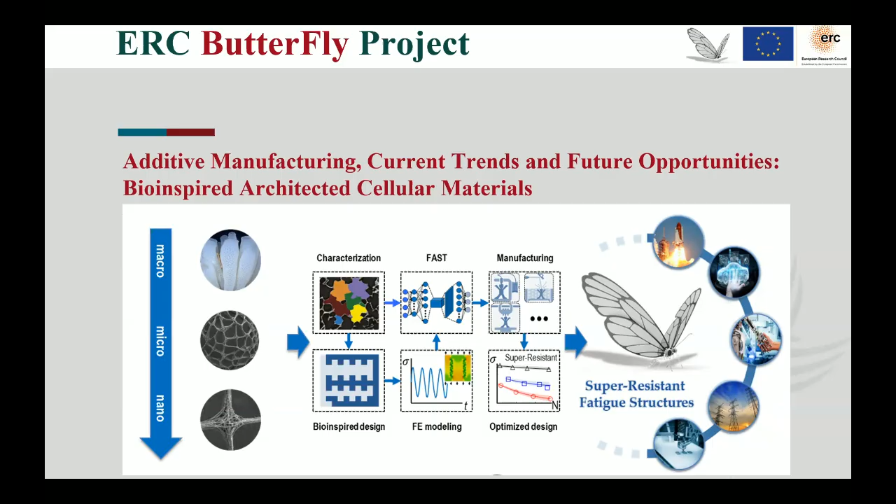The umbrella of the project is Butterfly, which is an ERC financed project, where we have tried to create a super resistant fatigue structure starting from bio-inspired design. This is the aim of the project that I will introduce today.

Dealing with this topic of additive manufacturing as TC15, we have organized a conference that will be held in Vicenza, in Italy, in February 2026, and we will be happy to host all of you there for discussing topics related to additive manufacturing, in particular the structural integrity of additive manufacturing, which is the aim of TC15.

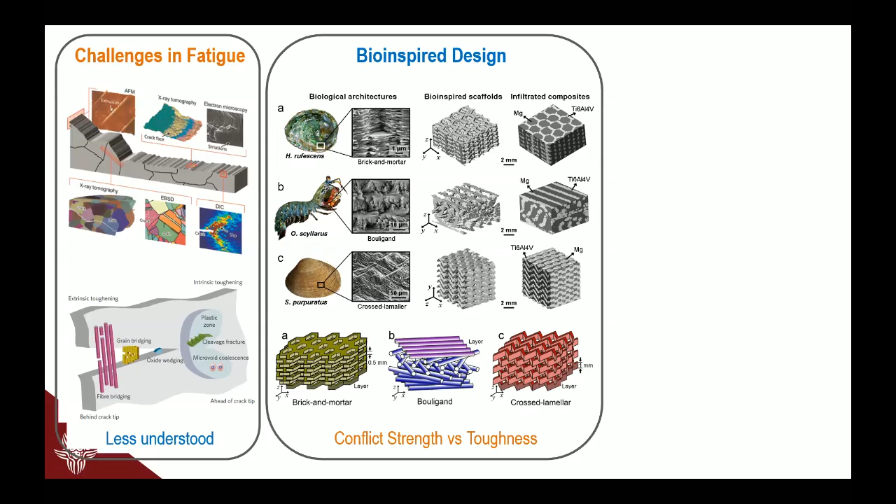It is quite evident that dealing with bio-inspired design, it is possible to solve the issue between strength and toughness. This work with Robert Ritchie has shown that there is the possibility to control crack growth and crack propagation in complex structures, by controlling the geometry of the structure and the relative density of the specimens.

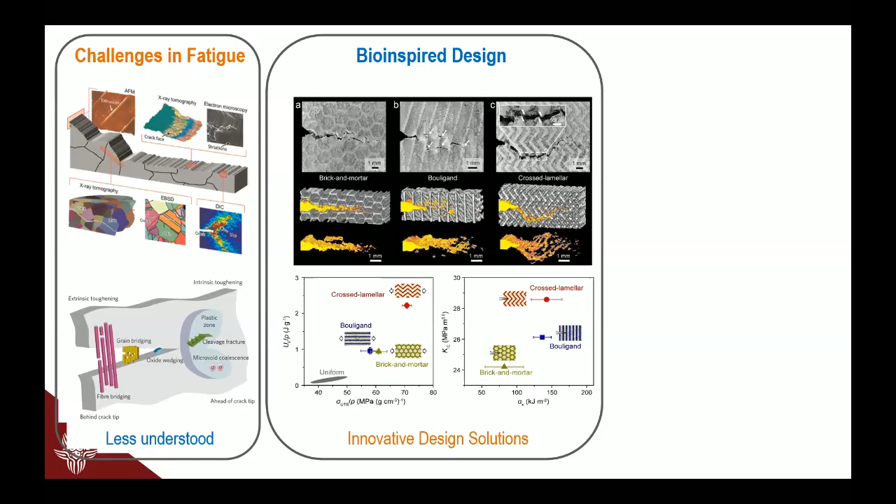So we can create, with bio-inspired design, materials that solve the conflict between strength and toughness, which are usually conflicting properties. We can create innovative solutions that provide a very strong improvement in the mechanical properties of materials, and actually completely change the paradigm in the Ashby diagram, creating new materials and new design spaces.

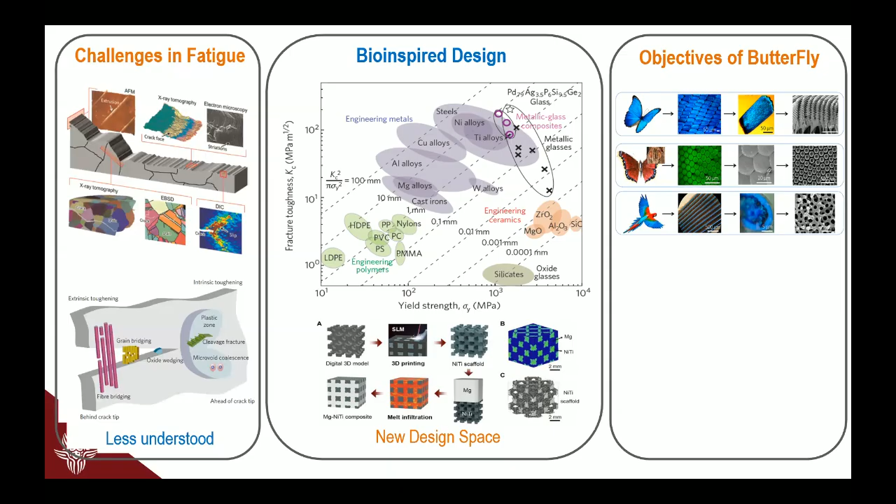The aim of this study that I will present today is to solve the same paradox dealing with fatigue loading, and open almost a new research field, which is bio-inspired fatigue design, a topic that was really not touched much by our community, despite a few researchers having worked on it. Nature is able to produce complex structures that automatically survive cyclic loading.

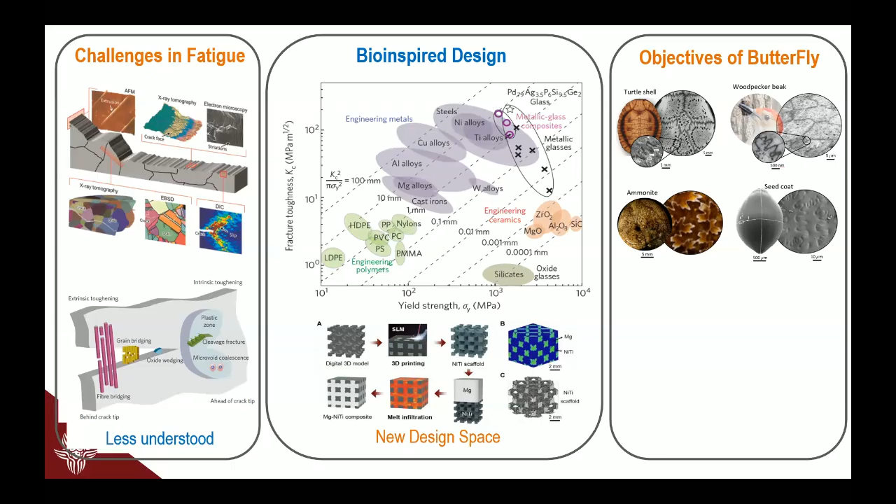I want to mention that there are specific interlocked structures created to increase the contact surface at the interface, improving the fatigue strength and fatigue life of components. So the question we asked ourselves in this project was: how can we create a new generation of super resistant structures with bio-inspired design?

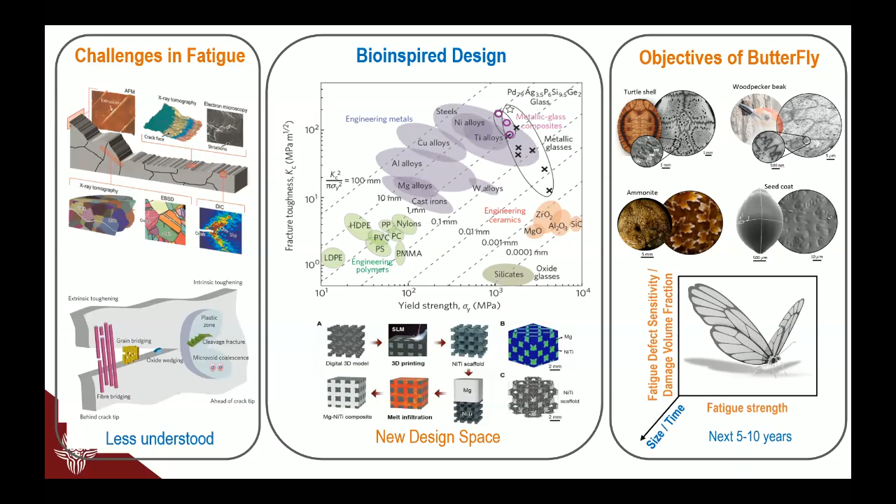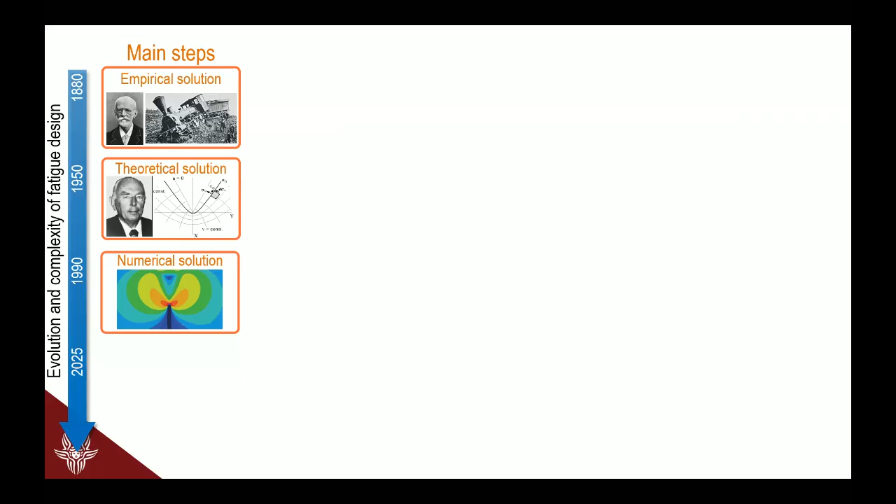The aim and the name of this project is Butterfly. We have also obtained some preliminary results, and what's important to mention is that dealing with fatigue loading, we started from empirical solutions, then went through theoretical proposals and solutions, and now we have the advantage of numerical solutions.

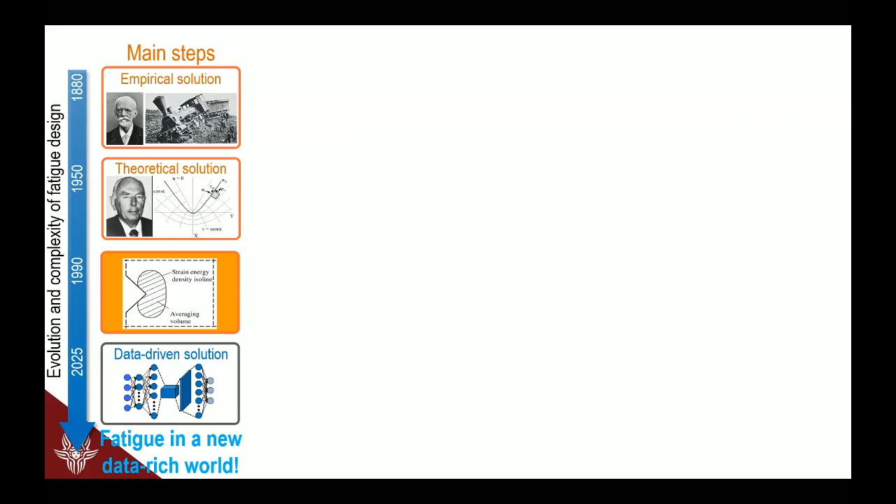But what we really have now is that we can see fatigue in a new, data-rich world with data-driven methods. Another important point is that when considering fatigue issues, and bio-inspired design in particular, there are three ingredients that you always have to consider to make a proper design.

The first point is to consider the metastructures or geometries of your components, which can be very complex. If you look at natural structures, they are able to tune the structure and compose the material in a way to increase and improve the property where necessary, guaranteeing the best resistance for the material.

After that, it is important to consider the constitutive laws, because especially for natural and bio-inspired design, this is a fundamental point. We are not only working with linear elastic materials, but sometimes, for improving the properties, nature is able to provide very complex constitutive laws.

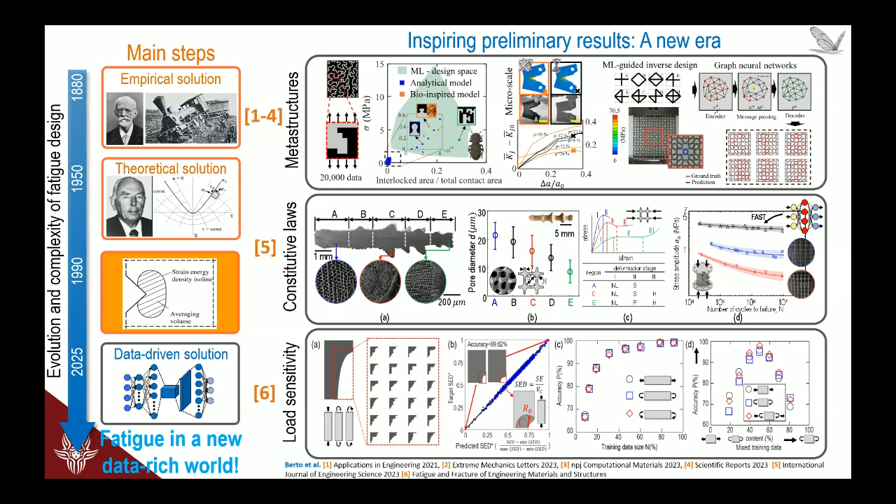After that, the third important point is load sensitivity, the capacity to undergo different complex loading, especially multi-axial loading, which is typical in real structures. We have also published some preliminary results dealing with these topics.

Dealing with this bio-inspired design, one of the best possibilities we have is to consider cellular materials, which are really bio-inspired complex structures. In these slides, we see some examples.

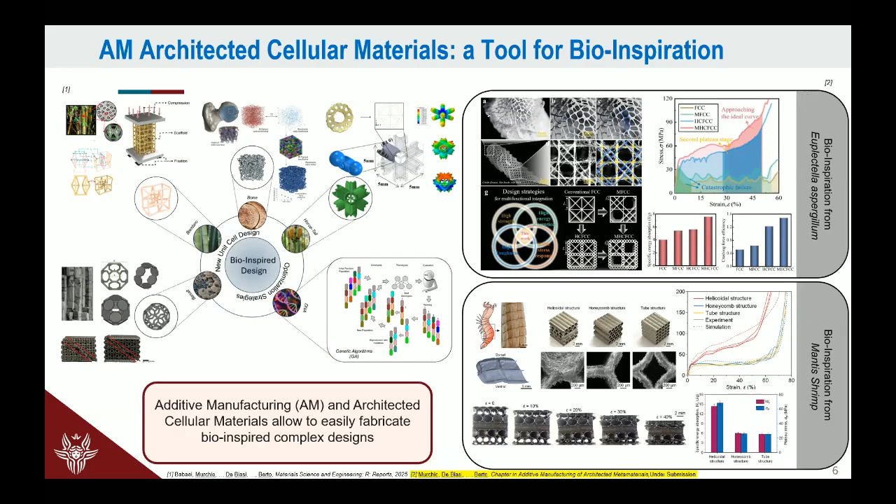What is also really important is that we can not only tune the geometry of the specimens or our components, but we can also tune or control the structure of the material itself.

This is a very good example of what I mean when we consider hierarchical structure, which up to now has been used only for solving the paradox between strength and ductility.

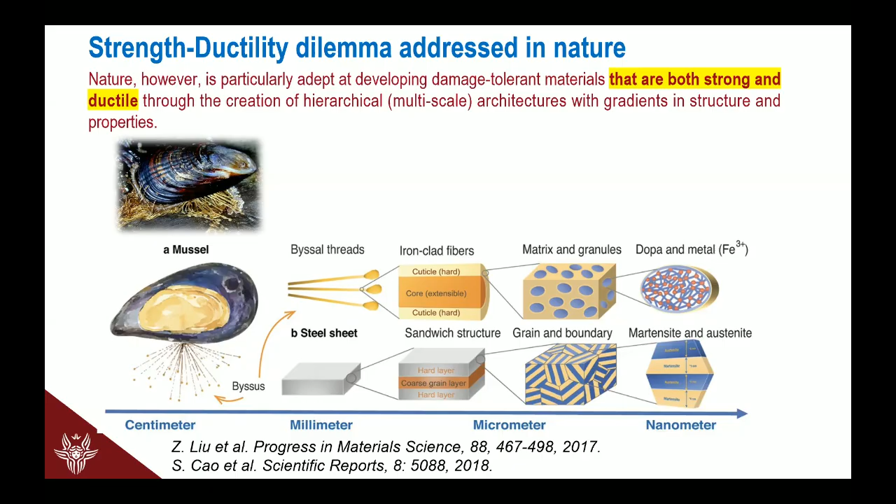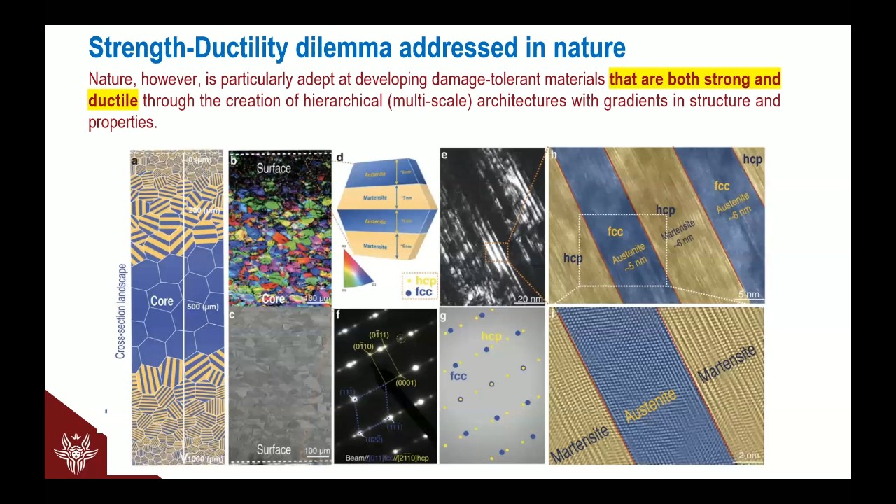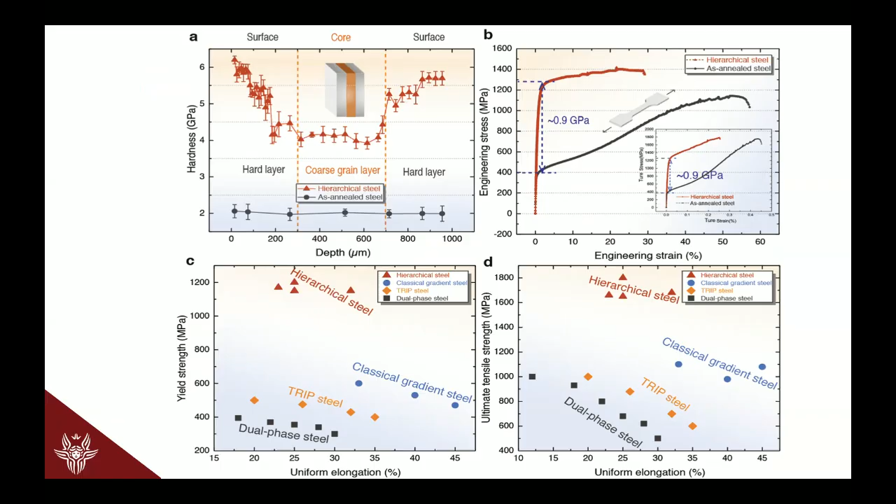You can obtain materials with a hardness that changes, with gradients in the structure, and that can substantially improve all the properties compared with classical steels, increasing substantially the strength, the yield strength, and also the toughness in parallel, which is quite difficult for standard components and materials.

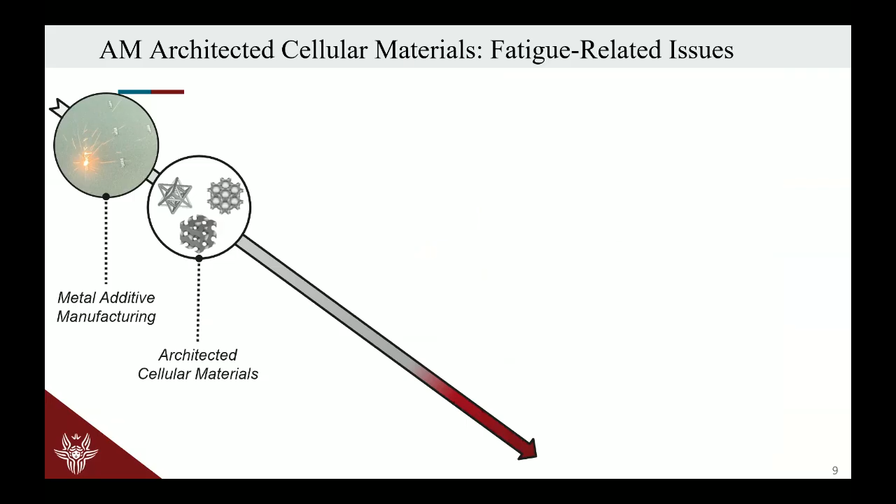Dealing with cellular materials, we have metal additive manufacturing, architected cellular material, which is the topic. Of course, when we have architected cellular materials, we have complex geometries, and the complexity of geometry also induces issues, because we have structural integrity issues, especially related to the fatigue problem.

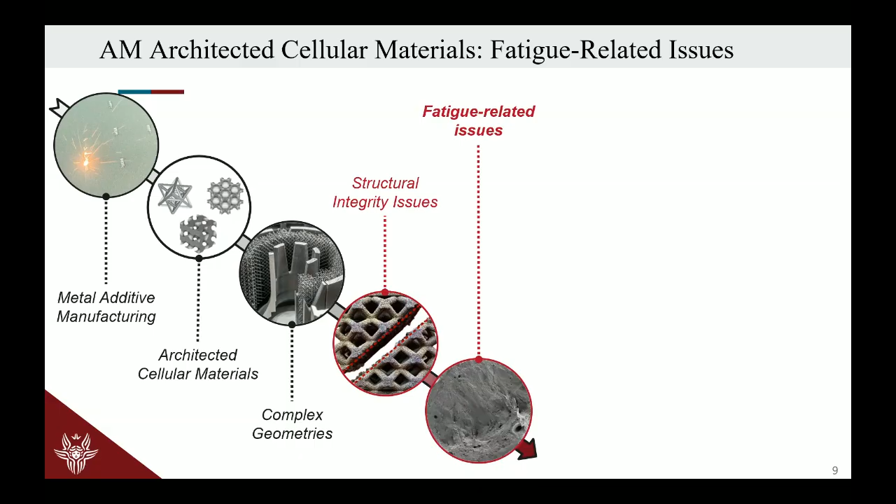So the main point is that we need to be able, if we want to use these structures for real applications, to understand how these structures are sensitive to defects and how they react to the presence of defects.

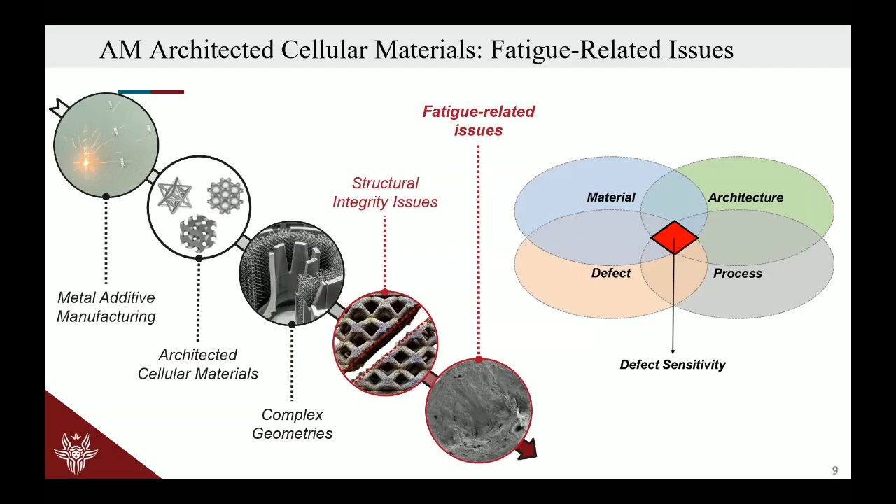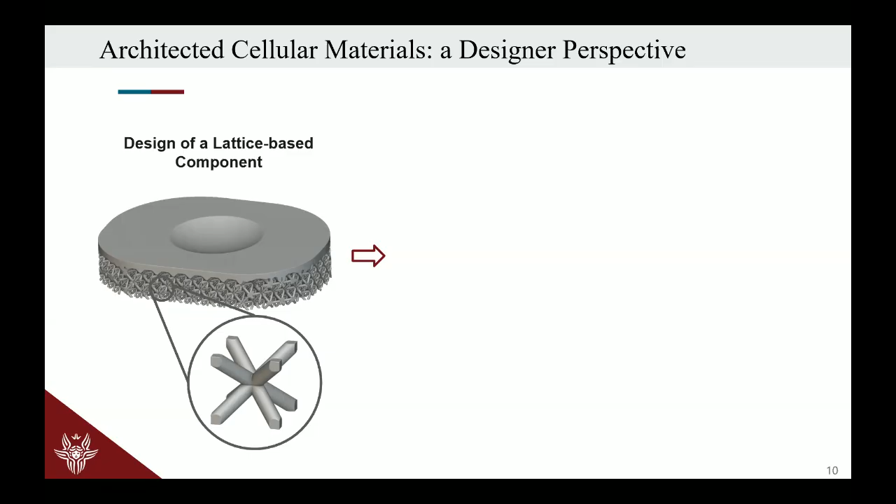So the first thing we did was to design and study very simple geometries for designing lattice-based components. The main aim was to create an as-designed FEM that could provide two requirements, but the more complex the component is, the more intensive the simulation will be. So if we want to study these complex components, we need a very strong computational effort, which is sometimes impossible for real applications.

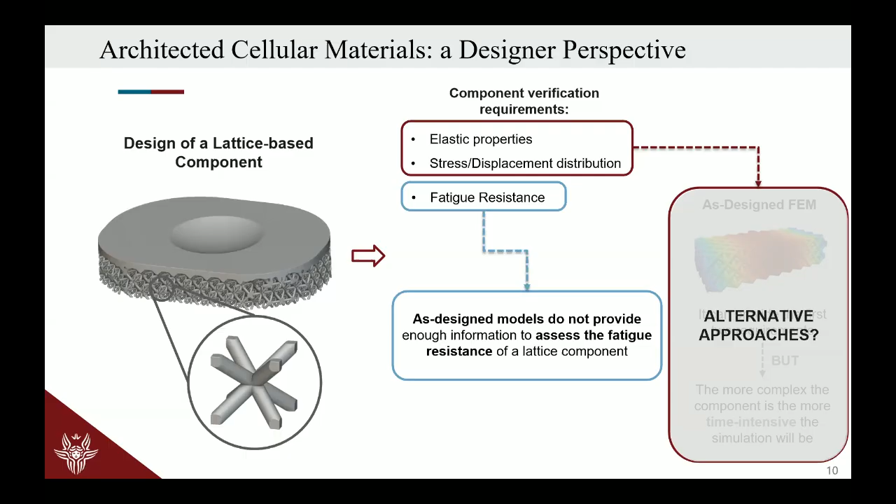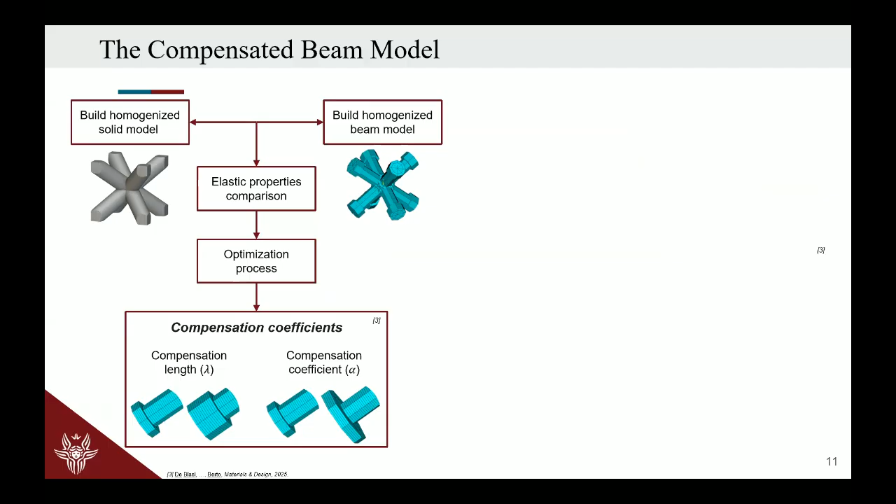So are there any alternative approaches to that? What we tried to do was create a simple model to represent these cellular structures. In particular, we proposed, inside this project, a compensated beam model that was set up and validated to show that it was able to fit the real behavior of the real lattice structure.

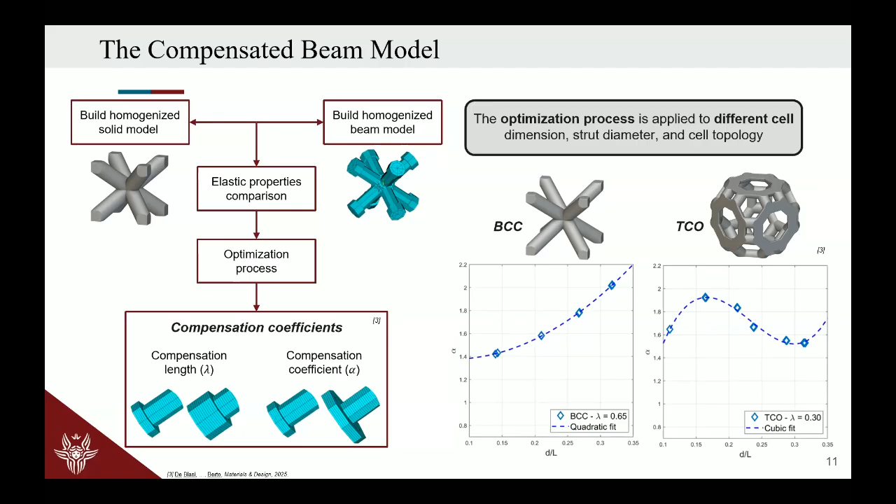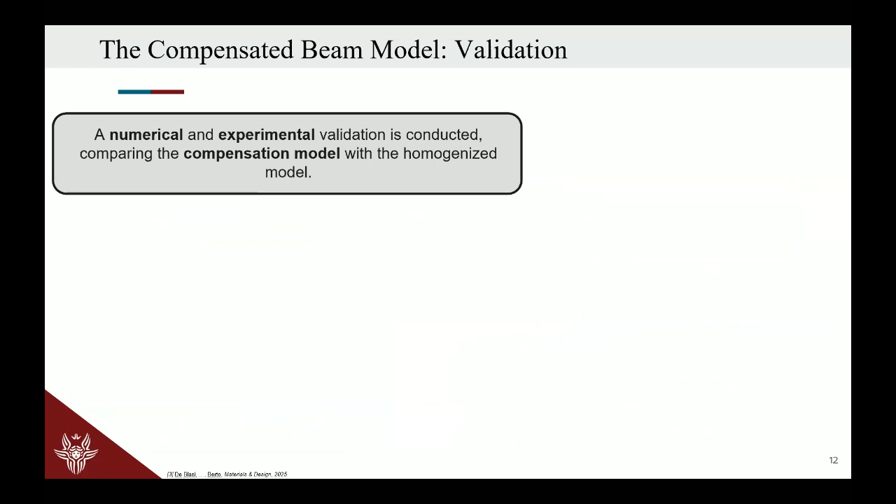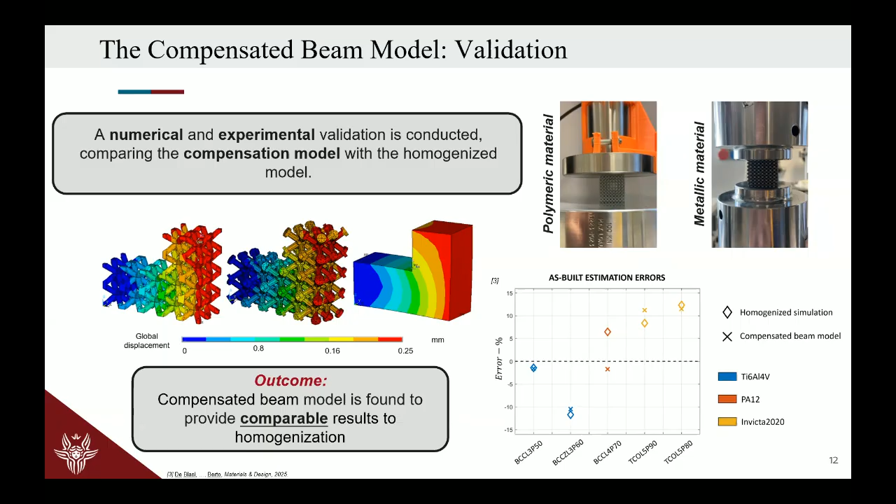A numerical experimental validation was conducted comparing the compensated model with the homogenized model, and what we obtained is that there is very little variation. If you see the graph on the right side of the diagram, there's a very small variation between the homogenized model and the lattice beam compensated model. So the outcome is that the compensated beam model is found to provide comparable results to the homogenization.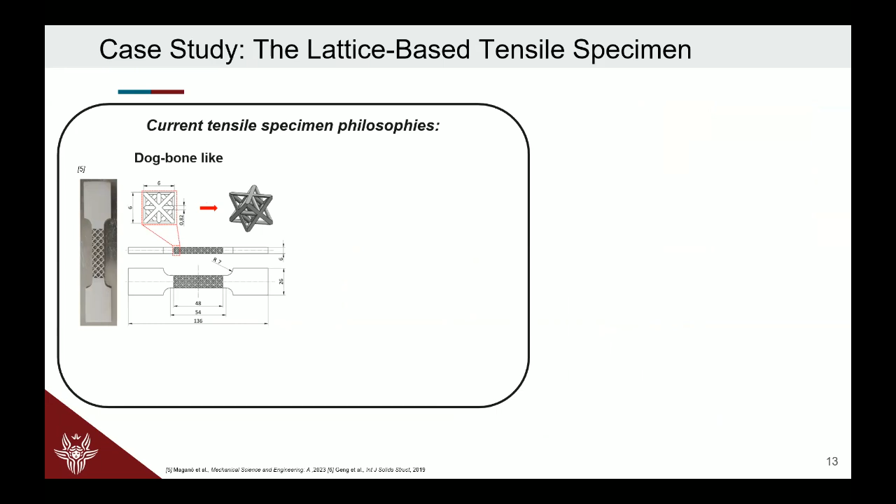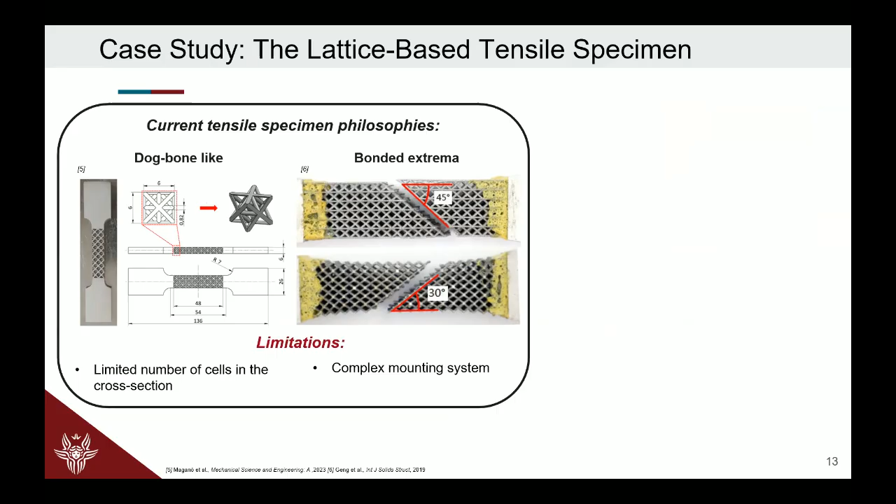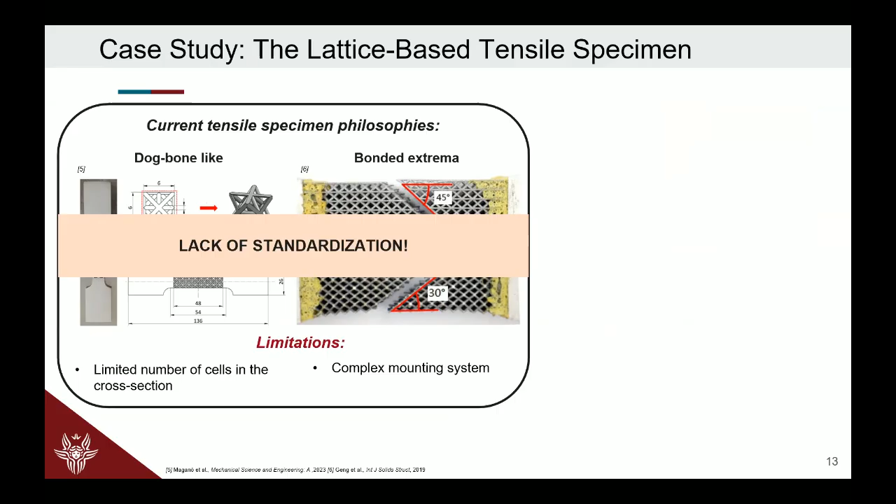Another important point is that dealing with these cellular structures, particularly with fatigue loading but also static loading, what is missing is a kind of standardization for the sample we need to use for the specimen. So as a second step, we tried to create a standardized sample that allowed failures in the middle of the specimen, always repeatable for different geometries of lattice.

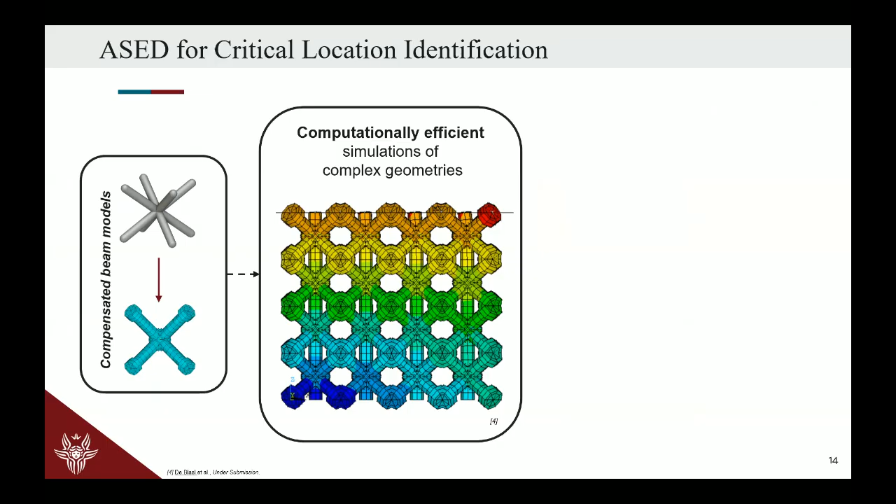So we studied the problem properly, and the idea was to have a computationally efficient simulation for complex structures. We use the strain energy density approach, which is very good for studying the nodes of this structure, which are the critical points, where we can consider a volumetric criterion.

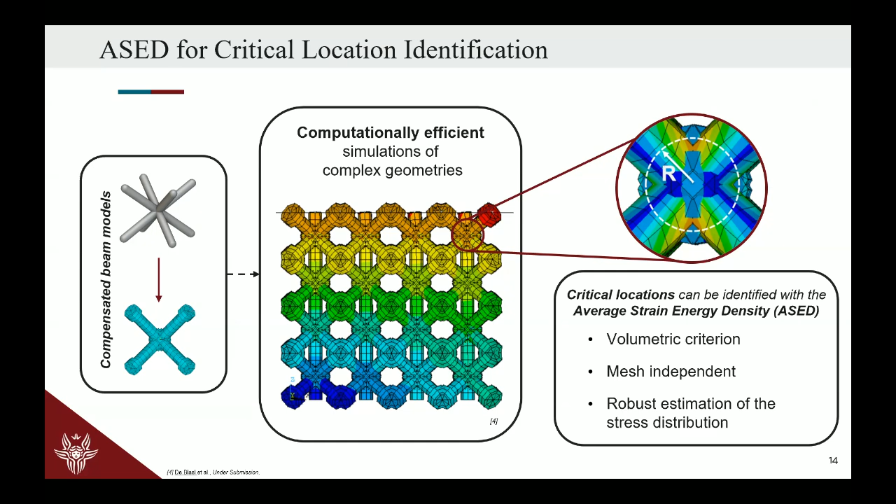We have the advantage that the criterion is mesh independent, so we don't have to take into account mesh refinement. And we have a robust estimation of the stress distribution if we first consider the strain energy density and later the stress.

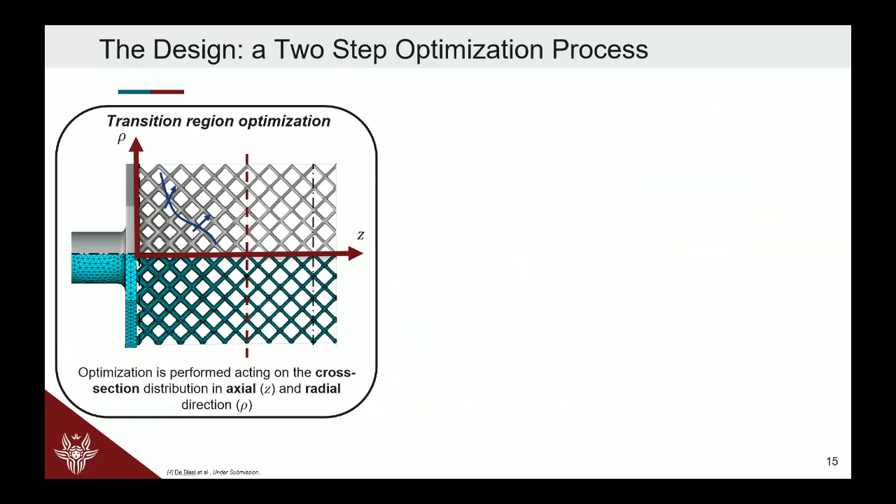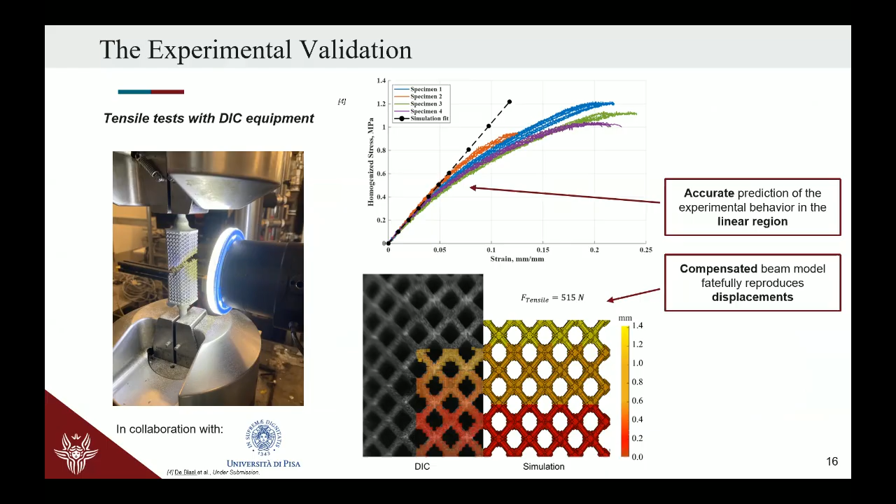So we designed new specimens with a density that was varying along the length of the specimen itself. We studied numerically the problem to optimize this kind of specimen. After that, we went through the experimental setup with the DIC to check if our predictions were correct, if the specimens were failing where we proposed according to the numerical models, comparing numerical with experimental results under static loading and now also under fatigue loading.

So dealing with these fatigue-related issues still remains an open problem, and microstructure and process-induced effects play a fundamental role.

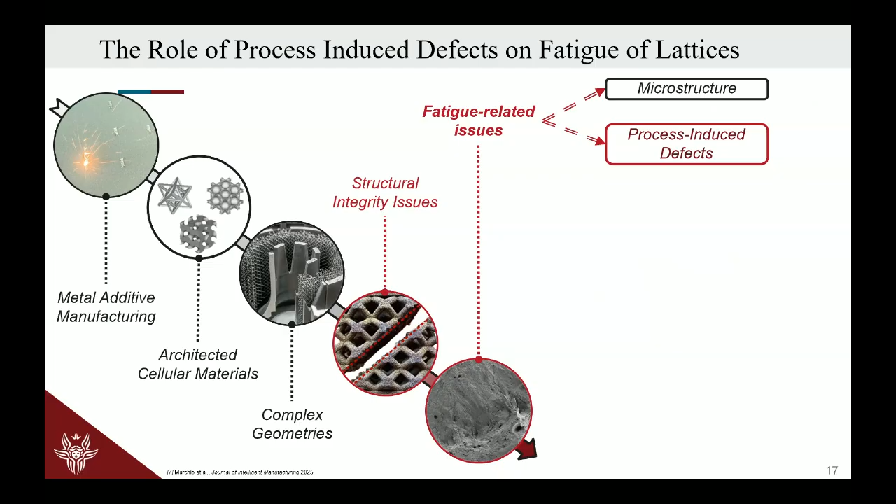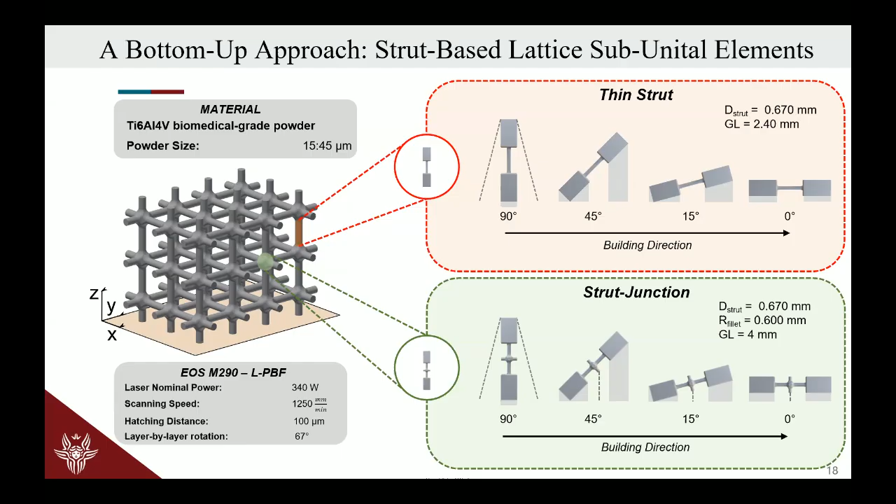So as a third step of this project, what we did was study the behavior of the thin strut of the component, and after that the strut junction of the components, to have a good understanding of the critical parts of the lattice material.

So here it's really a summary of what we did, just an overview. We made tests for fatigue of thin strut specimens, controlling and changing also the mean stress, as was already presented by Simone Murchio in another session on Wednesday.

And we have seen a very strong influence of the mean stress for the thin strut specimen, suggesting this is a very strong and important effect that we have to consider for lattice structures.

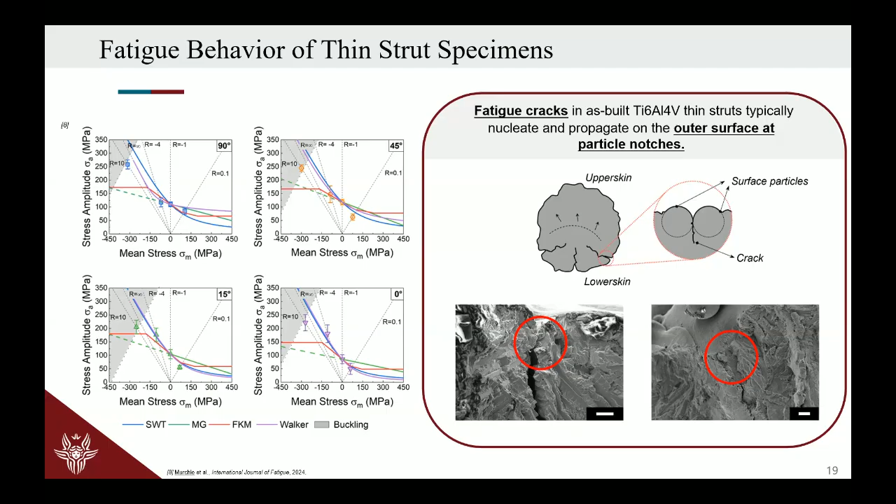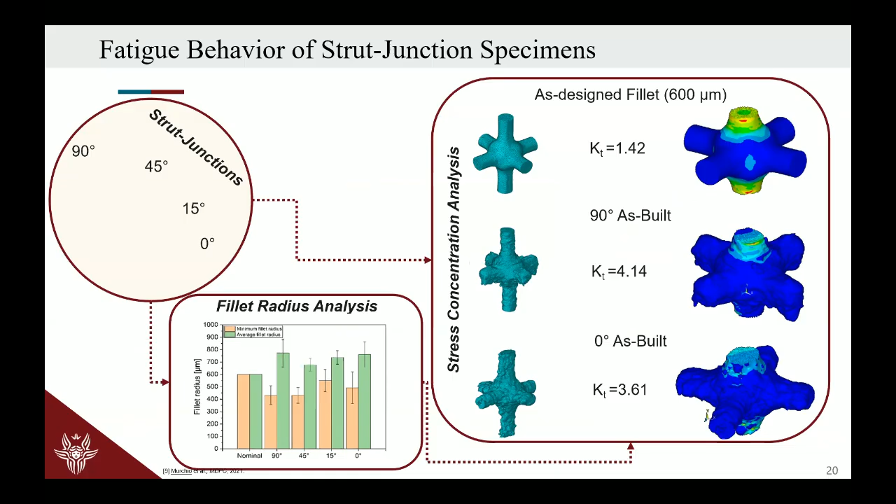After that, we also studied the junction, which is the critical point. The node is always a critical point for fatigue issues because we have variation of the geometrical features, and there you have the maximum stress concentration factor, and there you have the initiation of all the cracks that affect the final failure of the lattice structure.

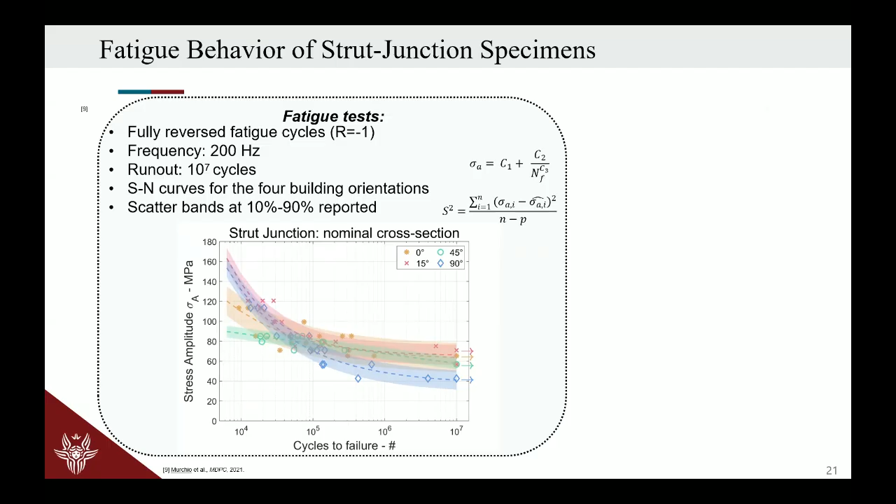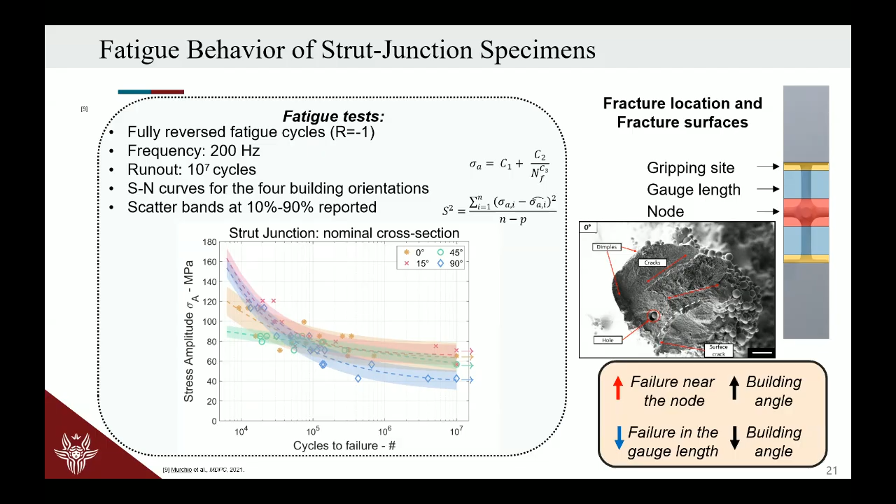Also there, we made a very huge experimental campaign that is only summarized in this slide for lack of time. But the results have shown that failure near the node happens when we increase the building orientation angle, and failure in the gauge length is more statistically probable, happening more frequently when we have a building angle that is decreasing.

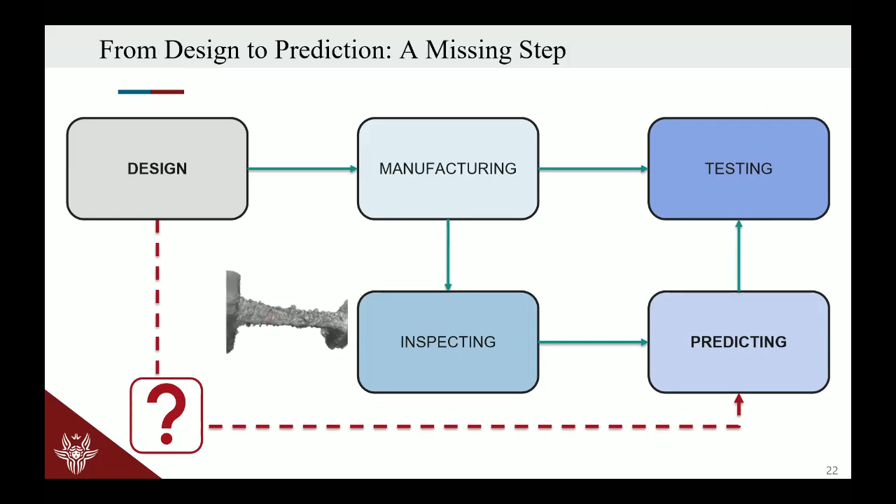Another important point is design, manufacturing, inspecting, and prediction, testing of course, but how we can connect directly design and prediction, because that is the final issue for an engineer, right? So we want to have a design, and a final assessment or prediction of the structure, avoiding useless calculation and useless finite element methods or computational models that are too expensive.

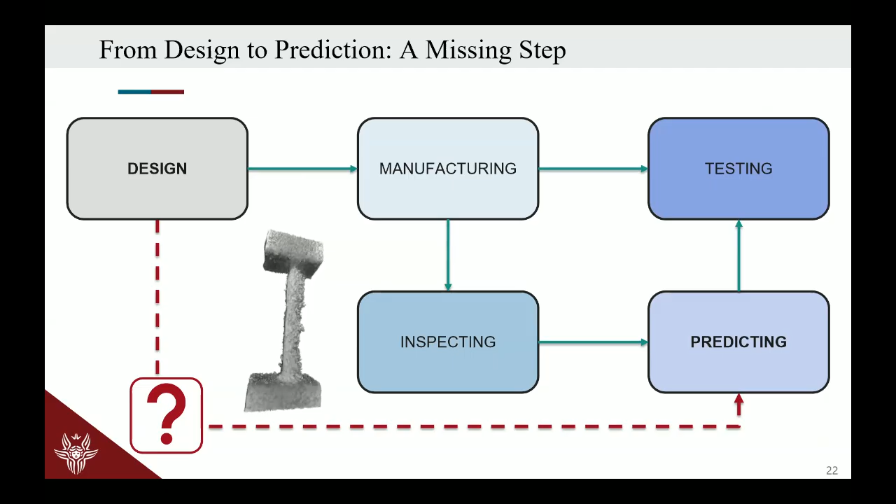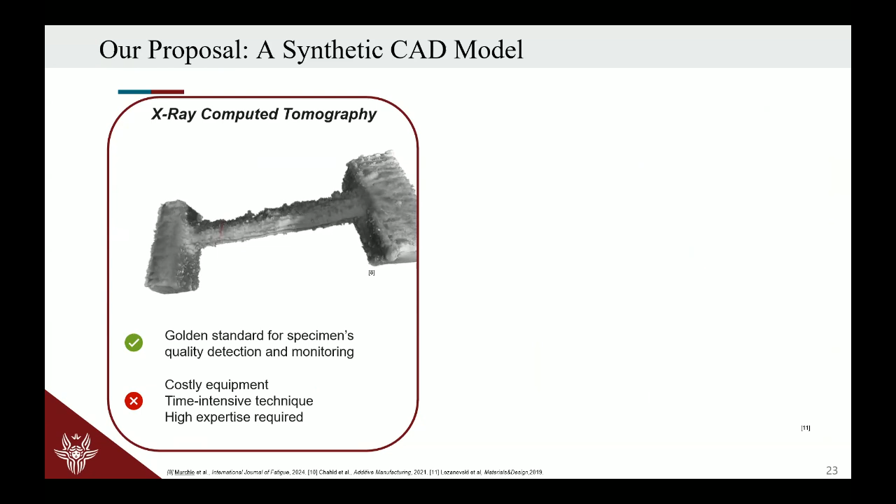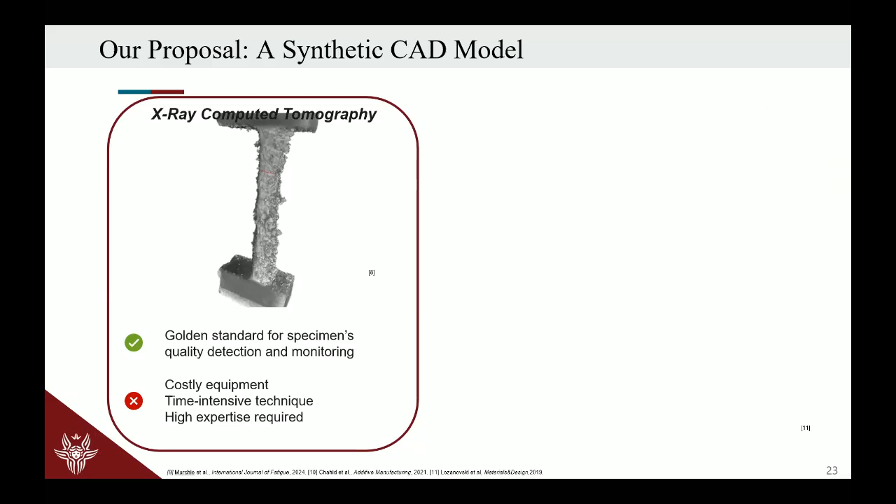So what we did is propose a synthetic CAD model. The idea is that usually when you consider this kind of lattice structure, due to the fact that the surface strongly affects the failure, you need a CAD model that is able to reproduce your structure, the surface roughness, and study that from a very accurate point of view.

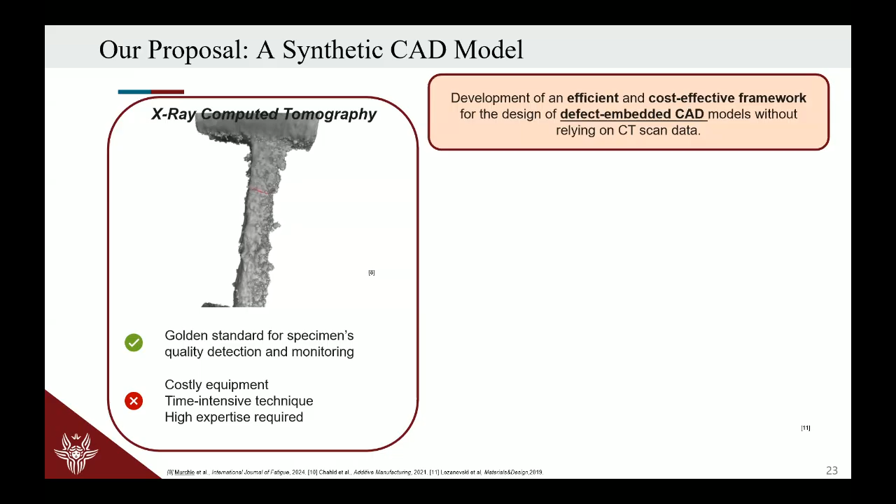But this is very cost expensive, and actually what we want to do is create a simplified model. The simplified model is a kind of synthetic model, substituting completely the CAD strut model. So we want to create an artificial or substituting model that is able to completely replace the necessity of doing a CAD or CT scan analysis of your specimen.

So we propose a CAD strut model framework based on profile extraction, waviness and roughness, and 3D spline generation, that can work without making any CT scan, which is very expensive and very time consuming.

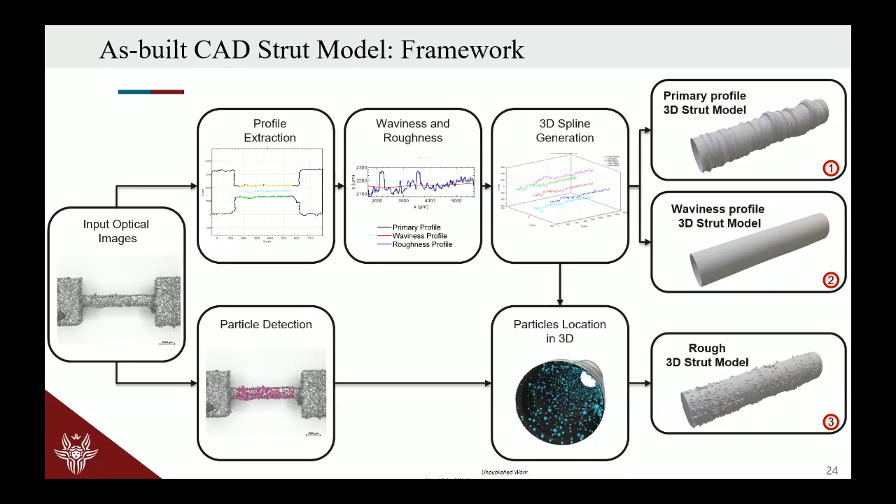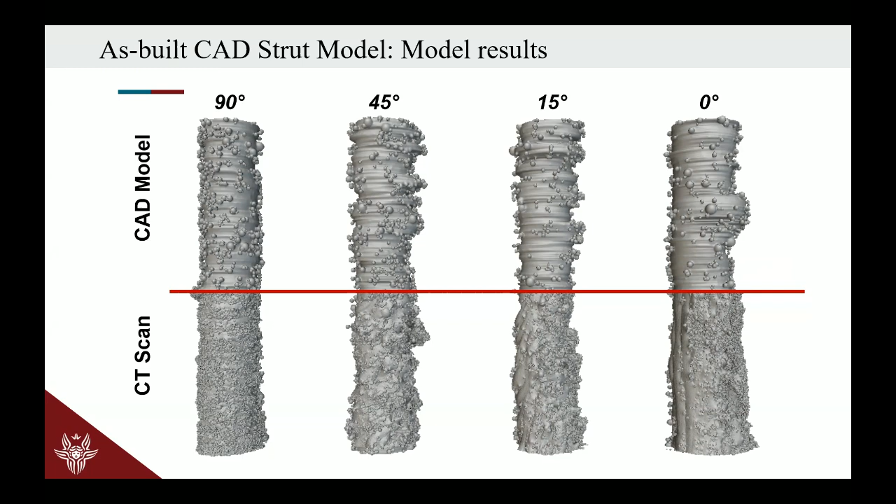After that, we also went to the life prediction or fatigue life prediction of this structure. I will be quite brief, but we proposed the strain energy density approach, which is quite efficient because, as mentioned before, it's not sensitive to mesh refinement, and the results are quite accurate even with coarse meshes.

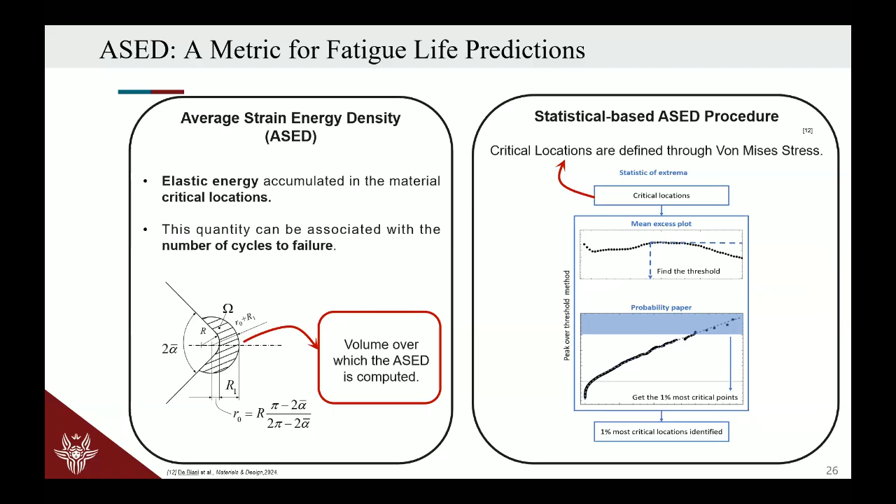So first of all, we evaluated whether with the CT scan model and with the CAD model, we were able to check and find the real initiation point for fatigue failure in this kind of structure, and actually it works.

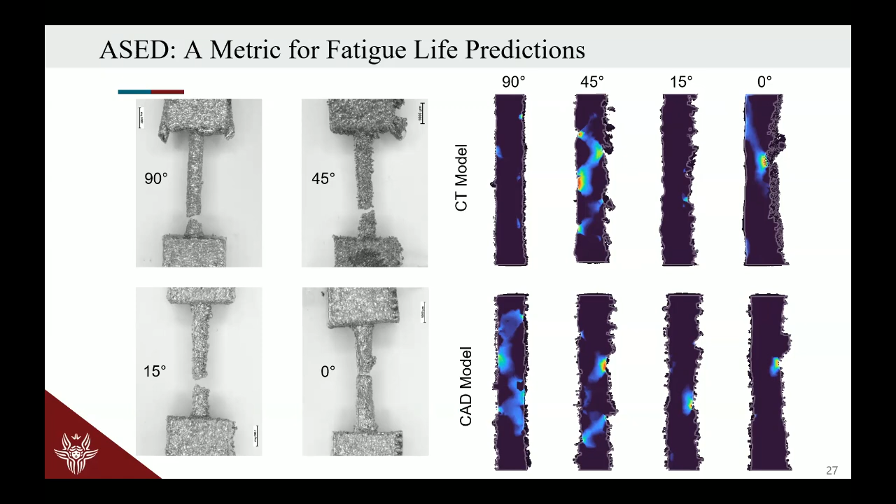It works not very well for the 90-degree sample because the orientation is very extreme, and we are still improving the model. But for the 45, 15 and 0 degree cases, it predicts quite perfectly the initiation point of the crack. Using the strain energy density, we were able to summarize all the data from different orientation angles and geometries inside the same scatter band, providing a kind of master curve for lattice materials.

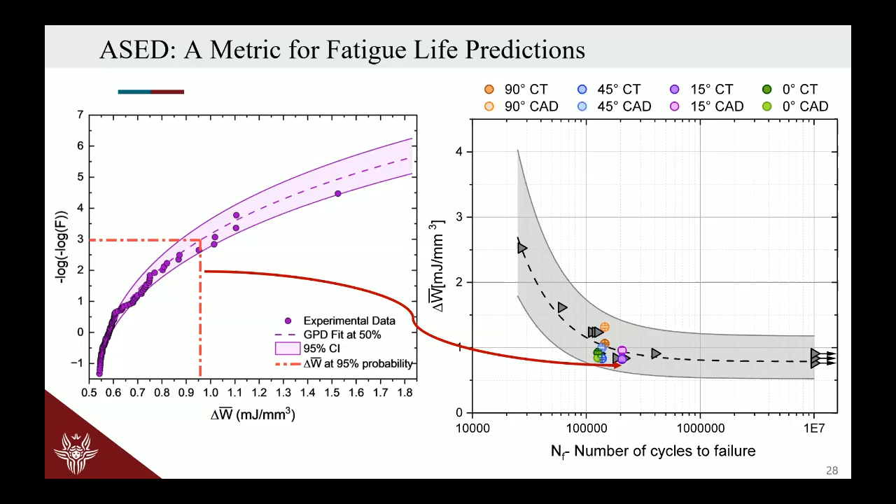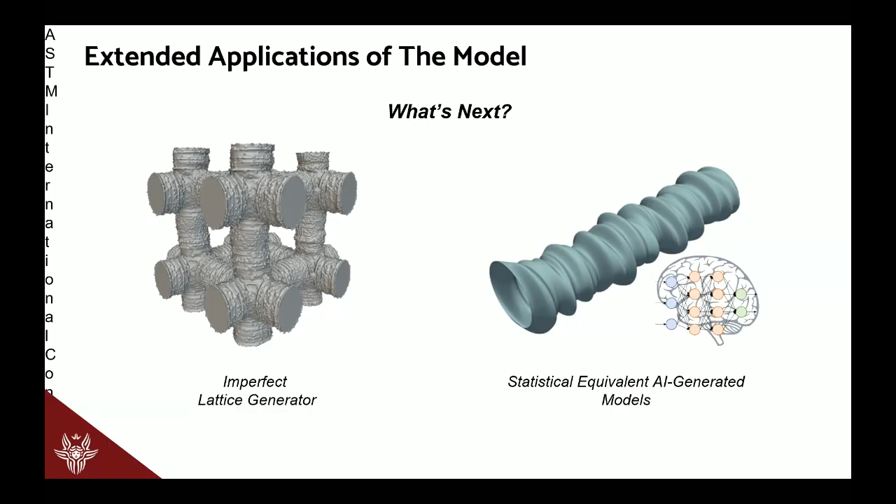So what's next? The next step is to have the help of a kind of statistical equivalent artificial intelligence to generate models that will help us bypass the finite element models, which are computationally expensive, while still providing a good profile and description of our lattice materials. The idea is to create a statistical database: point cloud generation, surface mesh generation, finite element analysis. But this is not sufficient.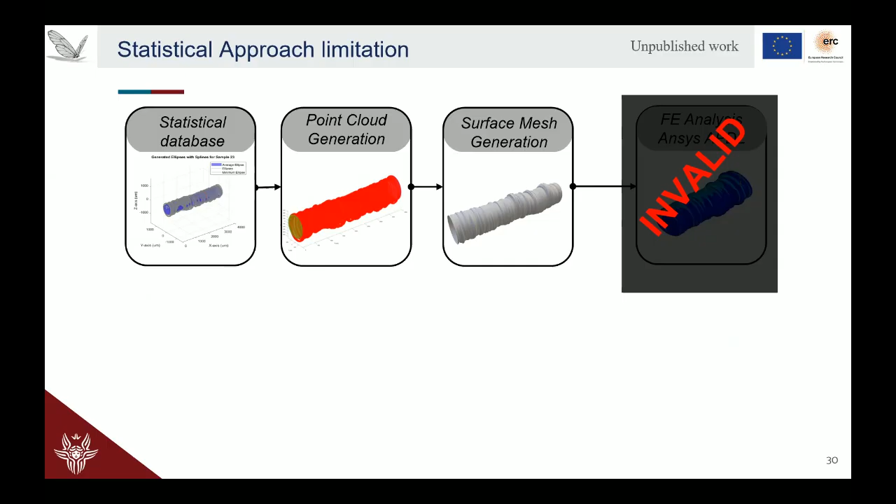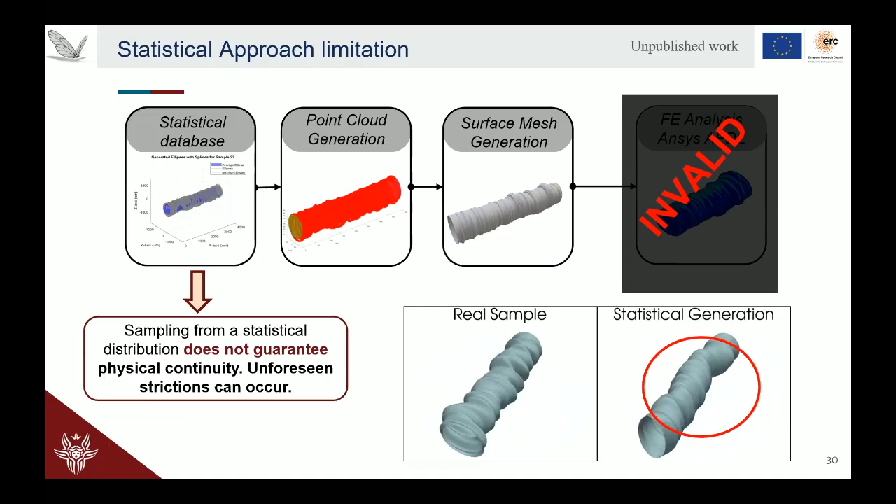Only considering continuity between the parts is not enough, so we use an artificial neural network that can learn the relationship between the generated strut and is able to make a better match with the real surface and the real roughness of the real structure.

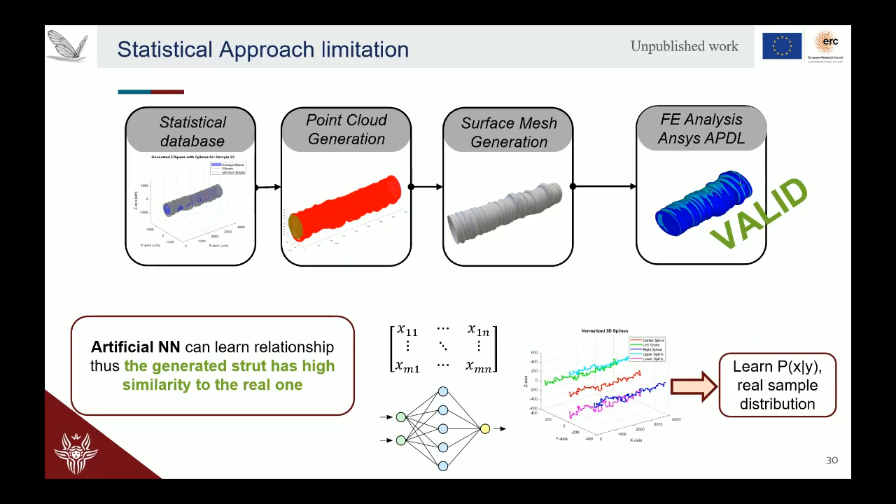So, the pipeline of the artificial intelligence model we selected is this one. We have selected a non-adversarial network plus a genetic algorithm. I will not go into the details here, but the papers will be available soon, so you will have all the material ready.

What is quite interesting is that with this artificial intelligence generated profile, we were able to obtain fantastic results that match the CT scan results almost perfectly.

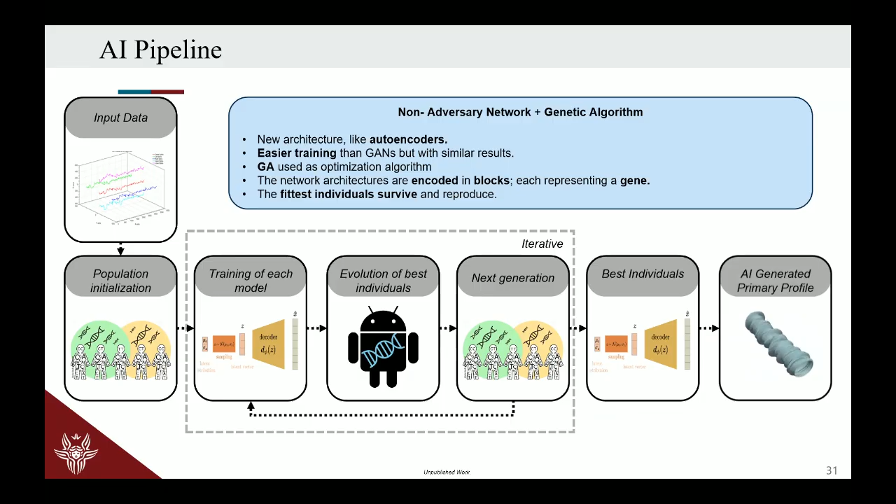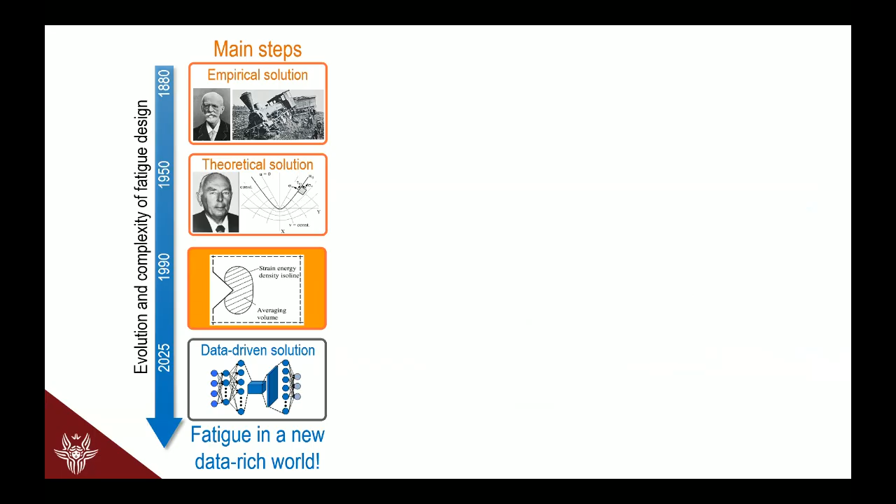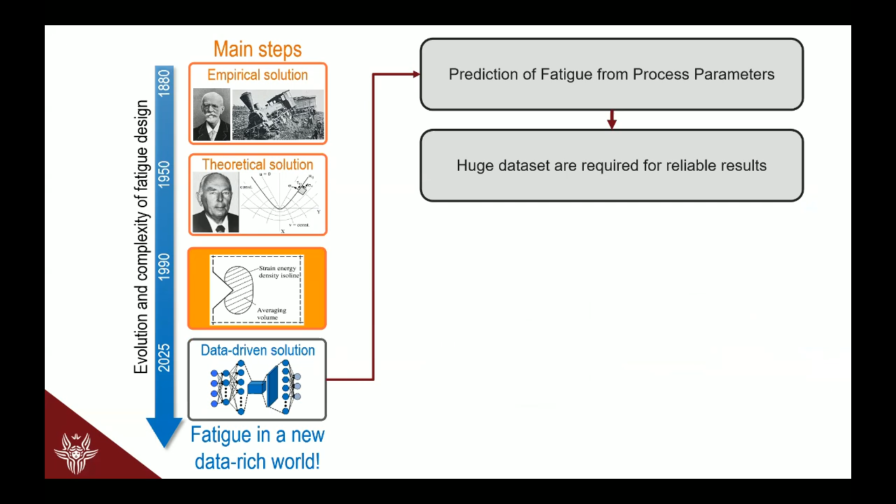After that, the main step I mentioned before is that we have placed fatigue in a new data-rich world, which was one of the aims of this project: prediction of fatigue from process parameters. Huge data sets are required for reliable results, but there is a lack of well-structured data sets from literature on AM fatigue.

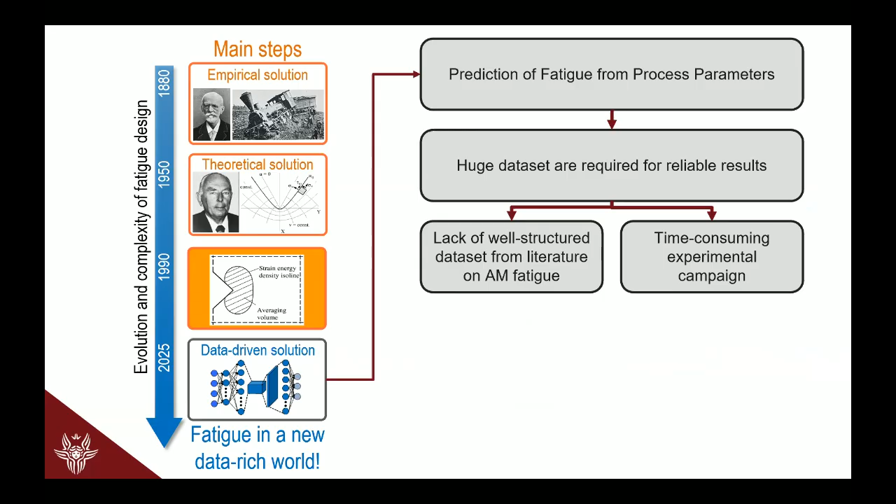It is quite time-consuming experimentally, but we want to build and validate this neural network architecture starting from FDM prototypes, which are not very expensive and easy to print, where we can study the geometrical features of these lattice materials. After that, we retrain what we obtain in terms of artificial intelligence network for the geometry, also applying it to metallic materials with a smaller data set.

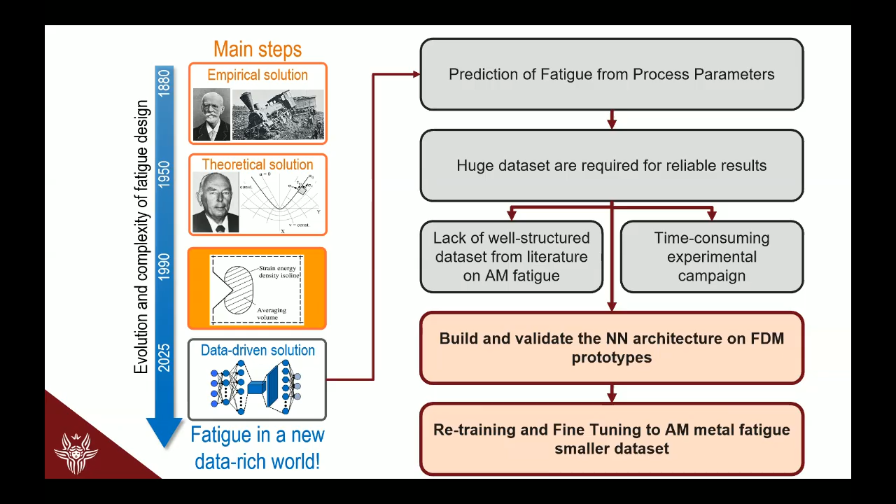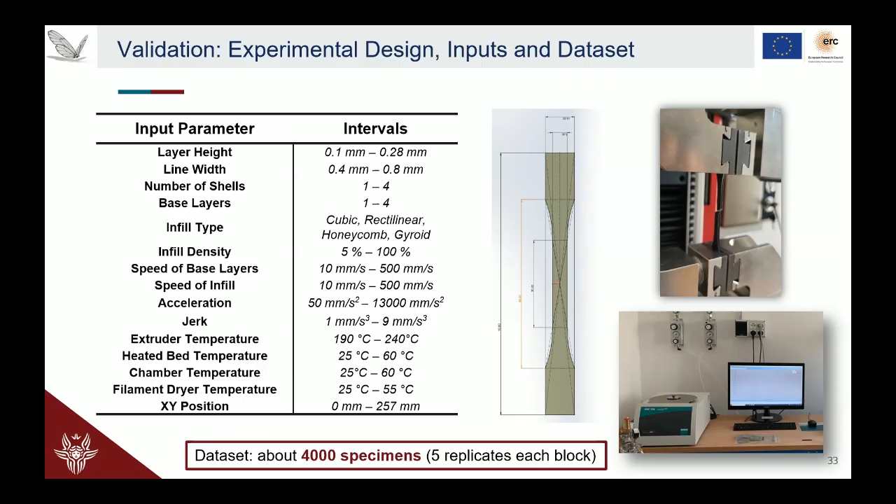So we started a very huge experimental campaign with more than 4,000 specimens, studying different kinds of materials, polymeric materials in particular, and we applied the algorithm reported here, an NSGA3 genetic algorithm, for the final static and fatigue prediction of this lattice material.

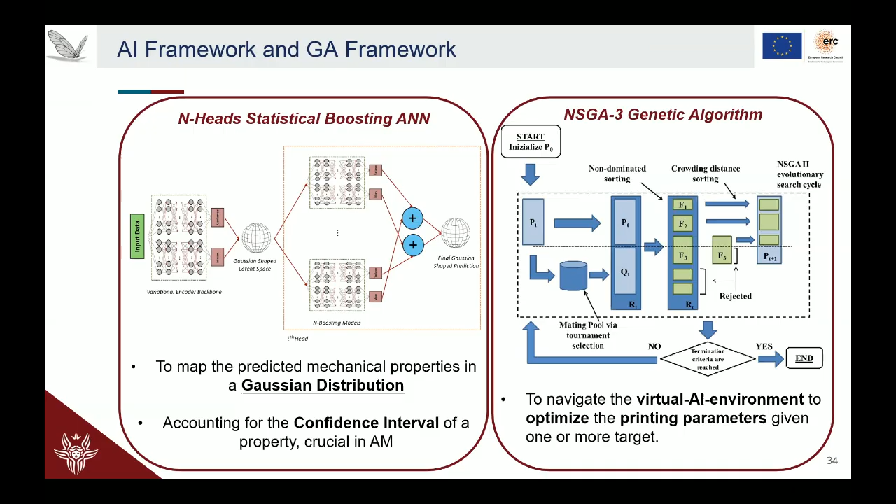We start from a very simple specimen, and after that increase the geometrical complexity to the lattice structures, studying what is happening geometrically and studying the macro and micro defects happening inside our structures.

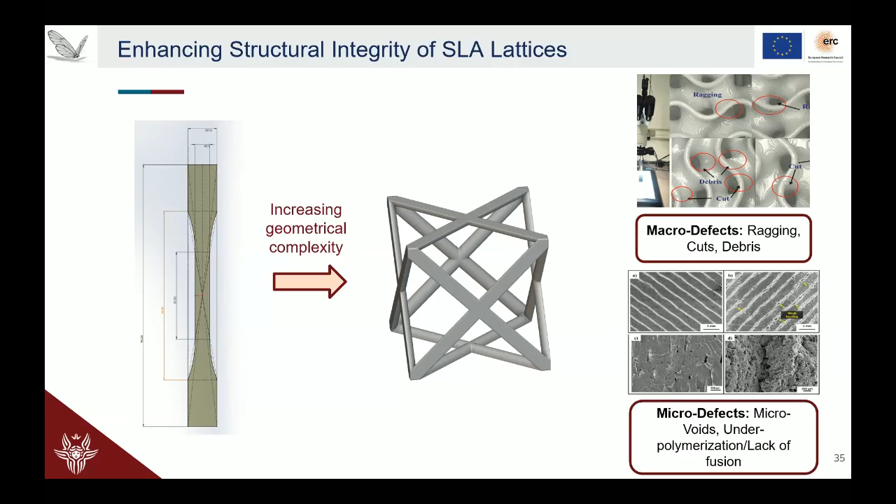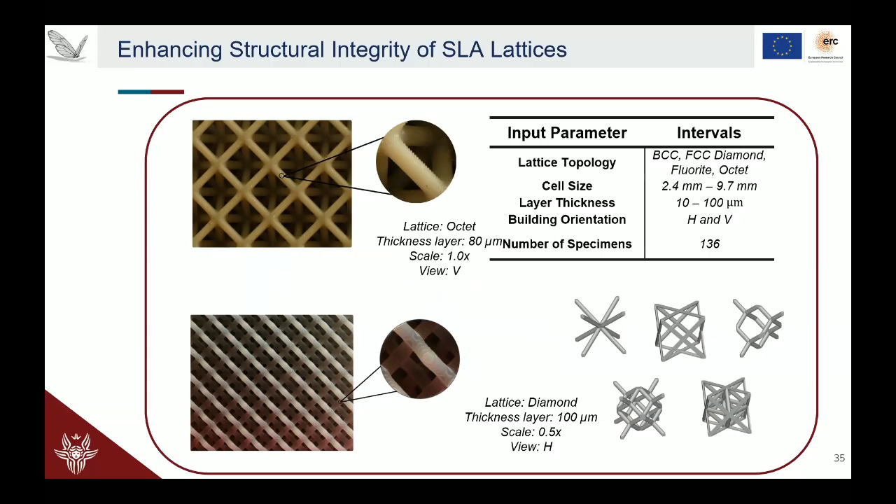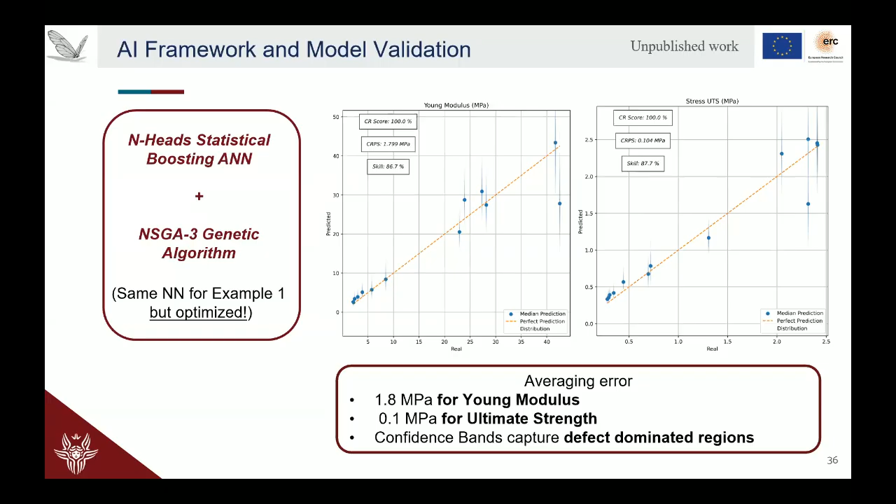As the last part of my presentation, the scientific part is finished. I want only to remember two great losses for our community; I had the luck to work with them both. George Sih, with whom I worked for more than 20 years — he was one of the fathers of mixed mode fracture mechanics, together with Fazil Erdogan and others at Lehigh University, which was probably the center of fracture mechanics at that period.

I also want to remember Les Pook, with whom we developed a lot of three-dimensional fracture mechanics that Professor Wanlin Guo introduced to you in the first plenary lecture of this conference. So I want to remember these two great researchers, who were also very, very important friends of mine.

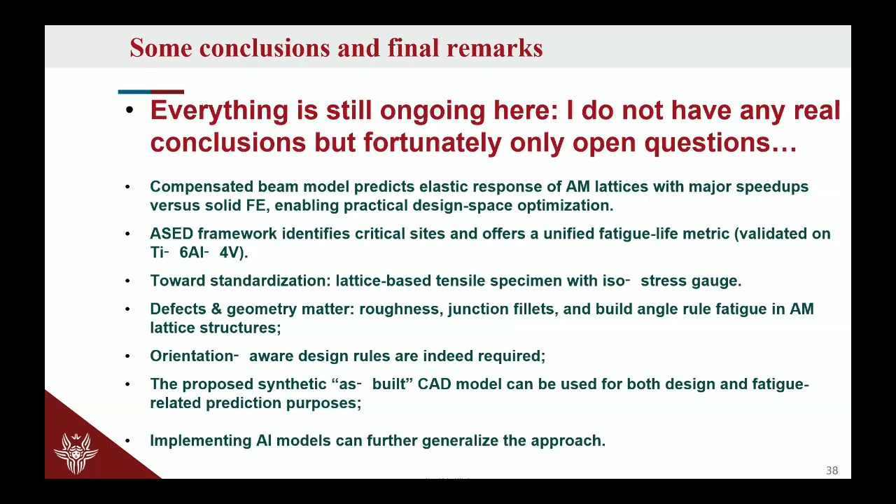So everything is still ongoing here. I do not have any real conclusions, fortunately, because we still have the possibility to work on the topic. There are some partial conclusions that you can read here, and I'm open for questions, but not too many.